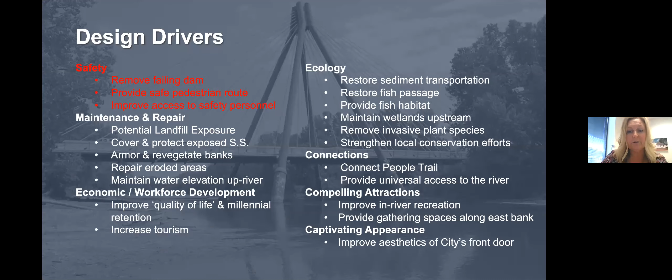All right, so I'll talk a little bit about the design drivers. When the city engaged Hitchcock Design Group and our team of engineers, they were really focused on the safety, maintenance, repair, and ecology of the river—things that Heather just mentioned.

From a safety standpoint, the dam was failing. It also causes some severe undertows and has been referred to as a drowning machine by the IDNR. Being able to actually provide a safe pedestrian route was really a key component as well, but then also access for the safety personnel within the city, because right now there's not a good way to get to the riverfront. So obviously we were looking at those issues.

From a maintenance and repair standpoint, on the west bank of the river we have the old city dump that has been capped, and on the east side of the river there's an active sanitary sewer line that is actually exposed at this point. The city wanted to make sure those areas were protected. Then from an ecological standpoint, the Lowhead Dam just stopped any kind of sediment transportation or fish passage, as well as caused some other issues.

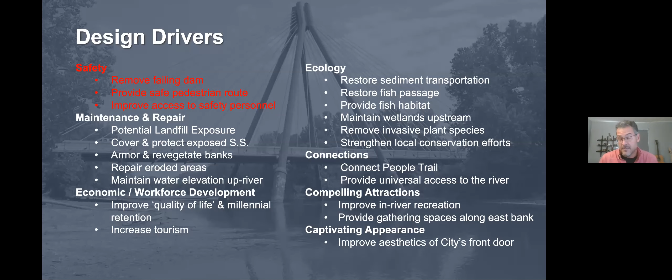So as we got into the design of the project, we had quite a bit—a pretty extensive public outreach process. A number of other things came about, including economic and workforce development, connections, compelling attractions, and this being the front door of the community needed to look good.

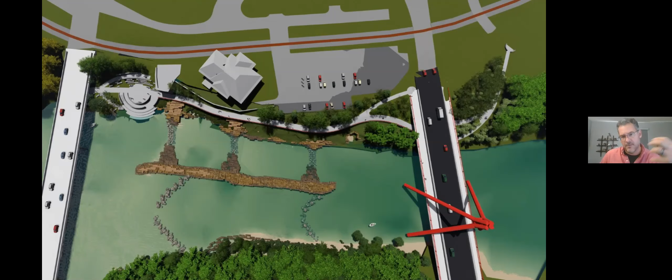So this is a plan view of the project, and what you see from the right, which is what's considered Second Street Bridge, there's a trail connection that goes under the bridge and goes through to the Third Street Bridge, and there's a plaza space close to the Third Street underpass. So we were able to create that safety connection, or safe connection, for pedestrians.

But then within the river, when the dam was removed, we needed to be able to hold the water up so we don't dry out the wetlands that are north of this area, but we wanted to restore all the habitat, or recreate habitat, that had been lost.

On one half of the river, on the right-hand side of the screen, that's going to be a rock riffle that will allow fish passage and sediment transportation. On the left-hand side is a kayak run, a recreational channel that we've created.

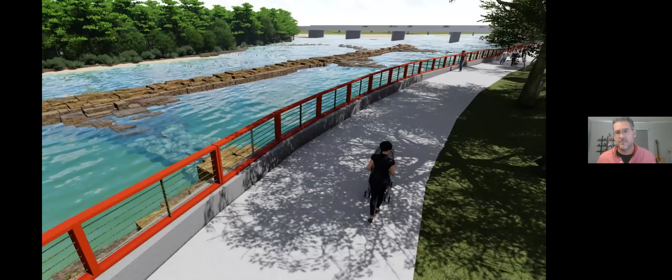That really came about through conversations in the community with a number of companies that were saying, we really want to be able to retain millennials, and we need to create things within the community that will make people want to stay.

So what you see here is a view from the People Trail connection that would look out across the river. The west side, we'll protect that bank and it'll be revegetated and just be green. The east side of the river is where we're going to be doing most of the reconstruction and protecting.

You can see there's a pretty significant retaining wall along there. That's actually protecting the old sewer line that's exposed at this point, so we'll have to be protecting that.

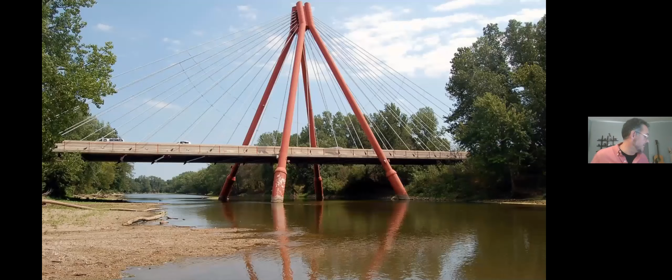So I've got a couple of dogs in here that have just showed up to join the presentation.

With that, I'll turn it over to Jason to talk about the regulatory side of things. As anyone who's worked with waterways in the United States knows, you have the U.S. Army Corps of Engineers that are very interested in the impact that work has on the river. Along with that, we have the Indiana Department of Natural Resources, which is interested in a couple of different things, both in the quality of the water and the land that surrounds it, but also the habitat and the impact that's made whenever work is done in the river.

The desire of the state would be to remove the dam. Indiana has 100 plus dams blocking passageway for ecology. So the solution that we've been looking at, that Hitchcock Group provides, creates that connectivity up and downstream, while also allowing for some of the recreational components, allowing people to come to the water.

For Indiana, this is a new solution, which creates some challenges in working through the regulatory process, which by its nature is generally conservative and doesn't have a ton of flexibility. So what we're looking at is how we convince the state and the regulatory authorities that connecting this river to today's urban environment, while still protecting the ecology, can occur, versus just thinking of the river in a static way like it was 100 years ago.

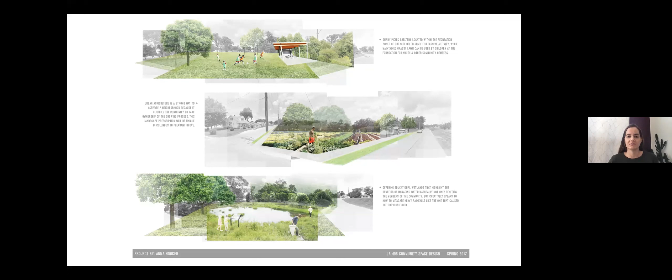So I worked with the City Parks Department, City of Columbus, and various other organizations that have become part of this pollinator park movement to create a plan.

We also worked closely with the surrounding neighborhood to create something they would enjoy in a space they could use as a natural recreation area, with a path system where they could appreciate native plantings and also create a space that could be an educational opportunity.

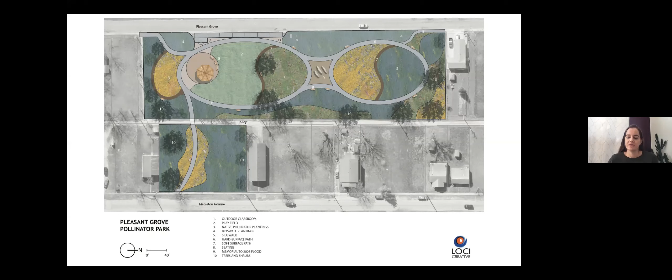We've talked with many in the community, local universities, elementary schools, and high schools about ways they could use this space to educate and learn about native plantings, native plants and animals, and biodiversity.

Just to show you the location, like many of our Midwestern cities, we have a lot of land near waterways. Our cities developed along the waterways. And so when these areas flood and become areas that can't be utilized as much as they once were...

We have to rethink how we can use these areas in ways that can benefit the environment and increase our biodiversity, but also become important connections to the surrounding uses.

This site in particular has a lot of uses surrounding it in terms of employment centers, the Foundation for Youth, neighborhoods, and connects to our people trail system.

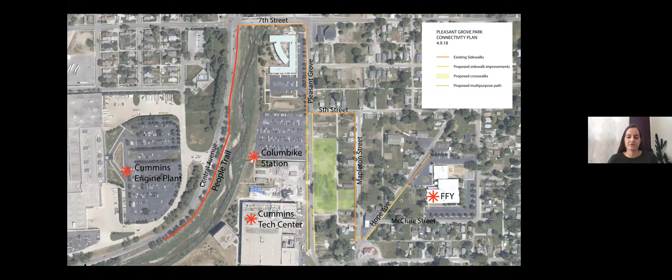So as we're continuing to fundraise for that particular site, we wanted to keep the momentum going with our growing group of volunteers in the community who are passionate about creating spaces in our communities, our parks, and our neighborhoods for increasing biodiversity.

So this is our second location at Pleasant Grove Park in Columbus, where we galvanized a group of volunteers over the last year to put in over 1,000 new native plants that we had donated from the state nursery.

We also worked to cut back the amount of invasives that were in the existing parts of the land. This was really not only an opportunity to improve the environment there, but to create volunteer opportunities.

Where people could connect, learn from each other about the plants, and about how to create these types of ecosystems in even their own neighborhoods and their own yards, which has been really exciting to see the connections being made in the community.

So this site, Pleasant Grove Park in Columbus, we've continued to work on, and we received a grant from the state that allowed us to put in some new signage. We developed some educational signage, so when people visit the space, they know that this is a pollinator park.

And they learn about what that means and why that's important. They can also learn about the local flora and fauna that they'll see in the space, and more importantly, how they can use some of these things they've learned in this park and recreate them in their own yards and their own neighborhood.

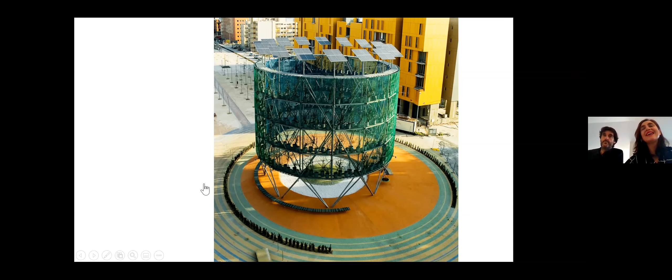So regarding the environmental, as I was mentioning, climatic comfort has been a driver of our work for the last 20 years. This is a project in the city of Madrid, where it becomes very, very hot and very, very dry during the summertime.

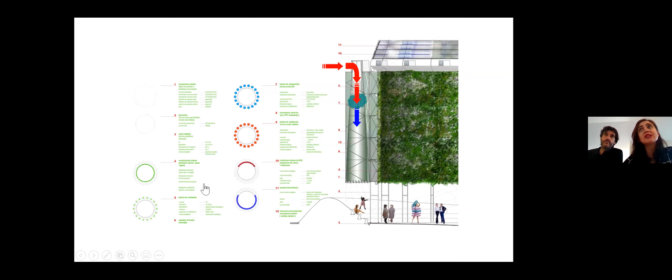So therefore people stay indoors. They don't want to come out because it's not so comfortable. So the idea was to incorporate this climatic comfort in the project so we could create the conditions for people to come out and use the space more intensely. So not only are we working with low-tech technologies, but also we are incorporating natural systems, and the idea of atomizing water in such a dry environment makes it more appealing and more comfortable. And these are some snapshots of activities during summertime.

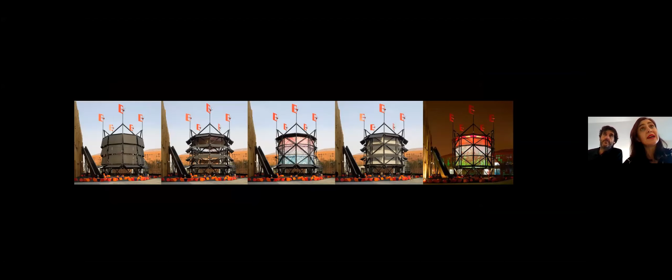This is a follow-up project in the city of Shanghai in China, for the 2010 international exhibition. The idea was also to provide climatic comfort, but of course the conditions are completely different because the air is very humid and very hot. So again, we were working with low tech to provide this, and one of the things we incorporated was natural breezes that make people feel much better.

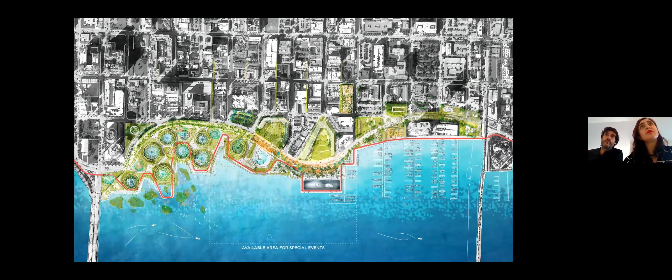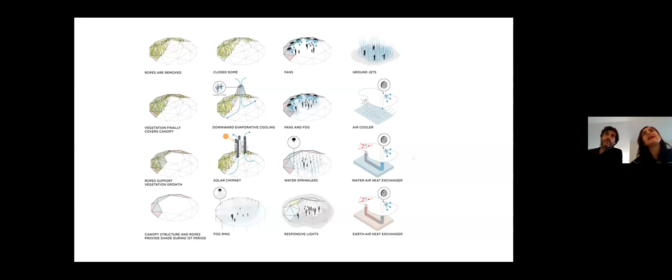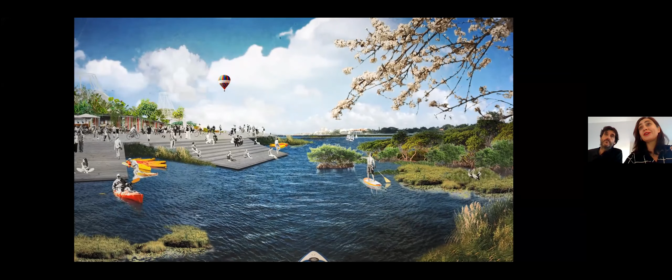This is a different project in the city of West Palm Beach in Florida, US. The idea was making a better connection and improving the conditions between the city and the natural systems, embedding low-tech systems that create better climatic comfort for people to come out. In this city, people don't use the public space much during summertime because it's very humid and uncomfortable. So we created a catalog of possibilities with low-tech systems that create different canopies, cultural and programmatic, creating a buffer space between the city and the water, and planning for what's going to happen in the next few years no matter what. So we have to start planning for it today.

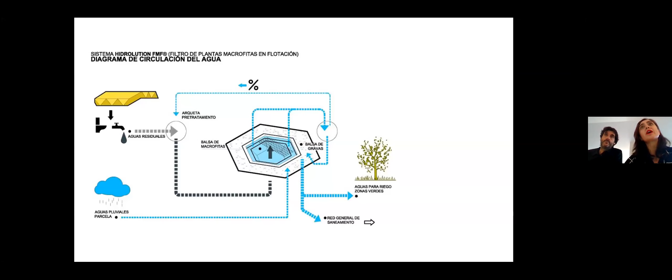This is another project that deals with water in a different way. We are recycling the wastewater from the building, which is a kindergarten, and we wanted to make sure we had water to create a green lawn in front of the building and irrigate it. The water is a big issue in the south of Europe, so unless we provided recycled water, it wouldn't make sense to have these green lawns, which consume a lot of potable water otherwise. So we worked with a company that uses macrophyte systems. Here in the picture you can see the macrophyte lagoon absorbing the pollutants from the dirty water from the building and storing it, and that water is available for irrigation.

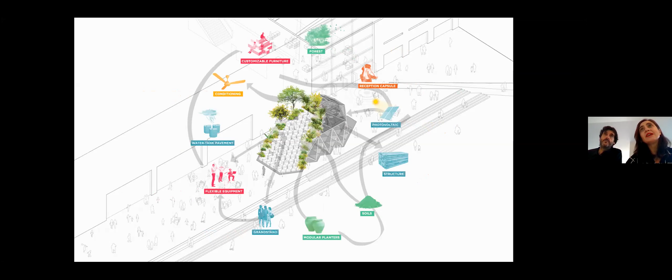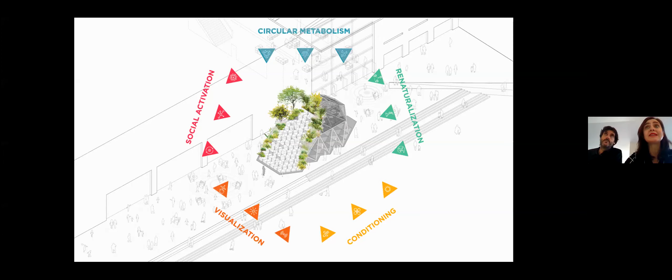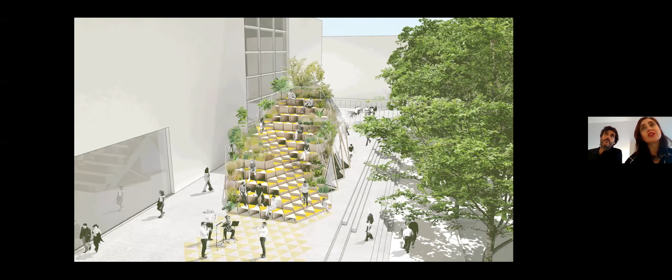This is another project that's going to be built in the next few months, and it's also about the improvement of public space. How can we reintroduce vegetation? How can we make a pedagogical hotspot in the city? And how can we create program in a space that is completely empty right now? This is just in front of a cultural institution in Valencia, Spain, and again the idea of education and the pedagogical is embedded into the system.

Regarding technology, we have been exploring different ways of creating interaction or interactive possibilities. How can people customize their public space? How can people book the public space? How can people reprogram the public space?

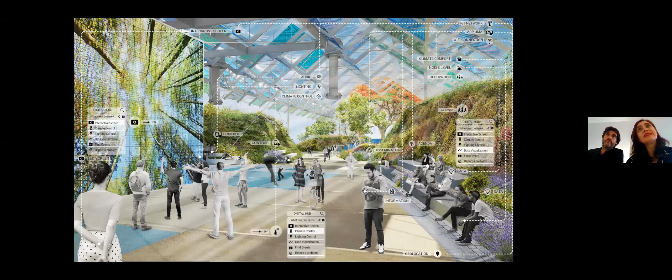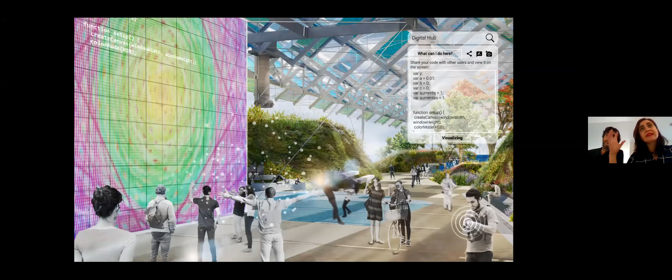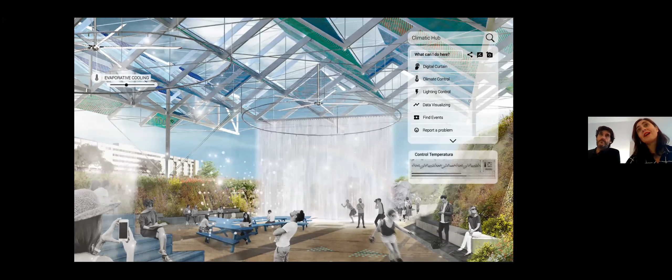This is a project in Malaga, for the University of Malaga — a 3-kilometer boulevard where the whole idea was to bring some of the academic activity that usually takes place indoors within the building to the outside. So the question was, can we create open space or open-air classrooms? And can we actually have the conditions to hold a lecture outside? Again, some of these systems are customizable, so people can interact with them — you can control the lighting conditions, you can control the climatic conditions. The idea was to create a blend between civil society and the people who usually use public space, and the academic community, which is very confined to their institutions. How can we design something that works for both?

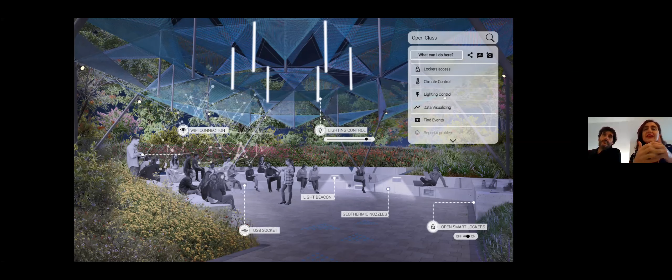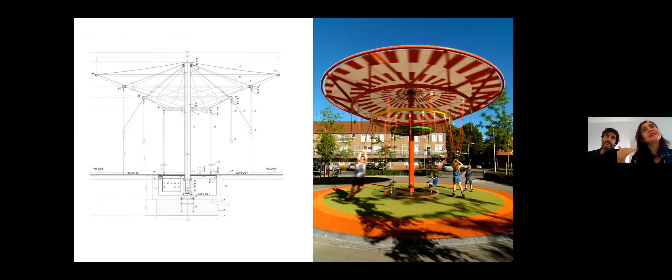This is a project in Dordrecht in the Netherlands, and it's also about creating playfulness. How can we understand that sustainability should be positive and playful and educational again? This is a carousel that, with the play and movement of the kids during the day, produces energy stored in batteries underground, and with that energy we produce the lighting at nighttime. We really believe that everything we do has an impact. We have the power to have a positive impact on both kids and adults, improving the environment itself, but also creating the seeds and conditions for people to be more aware of environmental issues.

And then the last component, the social, which I briefly touched upon with the other components. We very much care about what people think. We are all the time exploring how we can incorporate people's dreams, expectations, concerns in the design of the future, especially because we're designing and working in the cities that they're going to be living in. So it's something that we cannot avoid anymore.